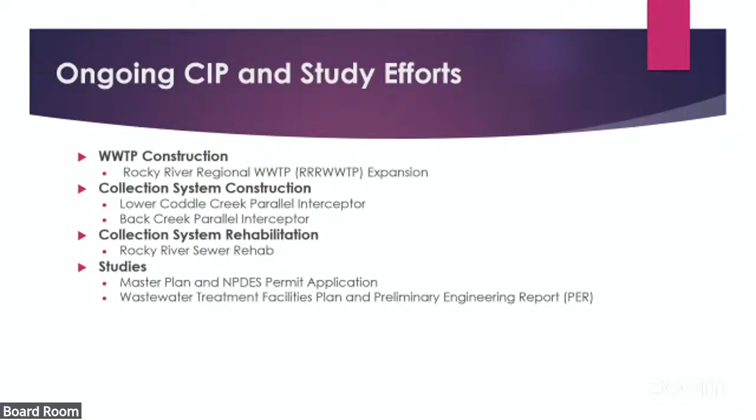Mr. Chairman, members of the board, it's been a couple months since we've done a summary of our CIP projects and where they stand, so just bringing that back to you tonight. There we go. Okay. So there are a number of efforts. We'll start with the treatment plant expansion, work through a couple of collection system projects, one collection system rehab project, and a couple of studies that are still ongoing as well.

And so Rocky River expansion, with all of the really small text here and a few pictures to the side. Over the past couple months, we have completed and commissioned Aeration Basin 5. We've got a series of 3 different aeration basins that we are doing modifications to as part of the phase 4 work. This was the first one of that phase 4 work to be commissioned in its new state at the plant, so that was a great milestone. We've tied in and commissioned all of the new RAS pump stations. We don't have RAS pump stations 1 and 2 for reasons unknown.

But they're all done and those are tied in, so we celebrate that as well. The EQ tank number 2, the work there continues. The interior shotcrete is done. The exterior shotcrete and the wire wrapping around the exterior has begun on that one. We completed the dissolved air flotation thickeners building, the DAFT building, and Crowder started installation of interior mechanical and electrical components there. There's a lot of work going on at the main pump station at the moment.

We decommissioned existing aeration basin 4. That is the next one in line. So we started from 5, we're going to 4 and then to 3. So we decommissioned it and Crowder began excavation in front of it for the aeration basin number 4 upgrades there. And the interceptor building is nearly finished at this point. Hopefully within the next month, we're finished there. But a lot of the interior features are going into it now.

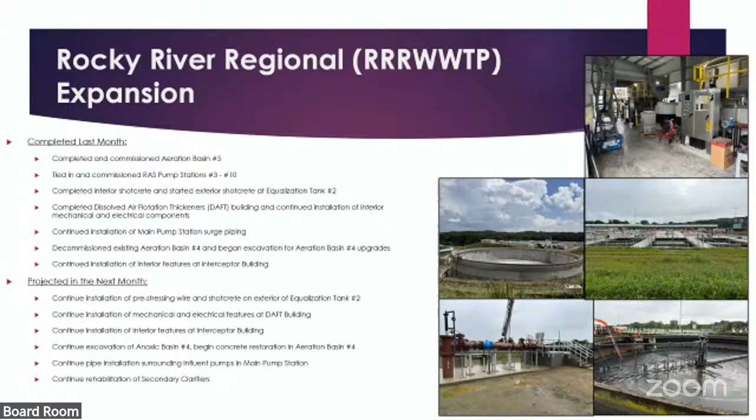This piping, these valves are original to the plant. We're putting some larger pumps down in there, so we'll have a new set of valves and 2 new pumps there as well once we're done with that. And then continuing rehabilitation of our existing secondary clarifiers also.

So moving on to a couple collection system projects. Lower Coddle Creek Parallel Interceptor is underway. This is going from the Rocky River Road area up towards Roberta Road, kind of that general area of things there. The contractor has installed about 4,800 feet of 48-inch pipeline so far.

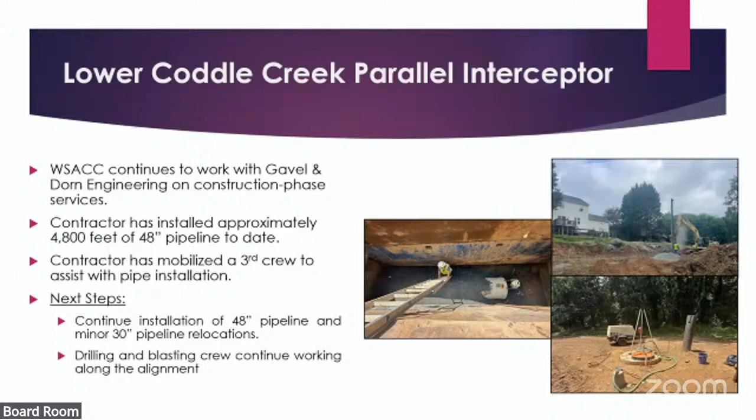They have mobilized a 3rd crew, so they had crews 1 and 2 within their workforce. They brought in a subcontractor with a 3rd crew, for 3 total, to assist them with pipe installation. So they are going to continue with that pipe installation, and drilling and blasting work is continuing for that as well.

Back Creek Parallel Interceptor. So far they have installed approximately 6,800 feet of, this one is 36-inch pipe. They have completed bores at Raging Ridge Road and Hickory Ridge Road. Hickory Ridge Road is kind of the upstream end of this work for them.

Our blasting consultant has completed pre-blast inspections along the alignment, and we're continuing to work with Black and Veatch and with Park, who is doing the installation work on this project. So they're going to continue installation of that 36-inch line and then restoration efforts along the alignment as well.

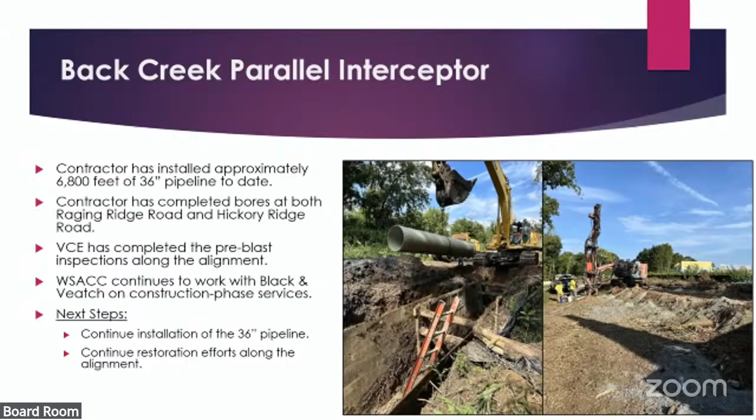So moving on, this is a rehab project along some existing sections of the Rocky River interceptor for us. HDR is working on design for this so far. They have completed all the manhole inspections along the alignment. This is a really swampy area, a lot of difficult access through this, so they did a great job getting that done. We have completed some camera inspections for the inside of the pipe of accessible pipe segments, areas that our equipment and our technology was capable of getting to along the Rocky River.

And so HDR is working with a company called SewerAI. They're reviewing that CCTV footage, the manhole inspections, and they're coding that. They're determining future improvements that will be in the plans and specifications that we should receive in a couple months here. And they have subcontracted with Duke's Root Control to perform some additional CCTV and sonar inspection in some of the most difficult spaces to reach along this line.

And so next steps, Duke's is going to continue with that CCTV and sonar inspection, and HDR is going to continue with development of their plans and specs.

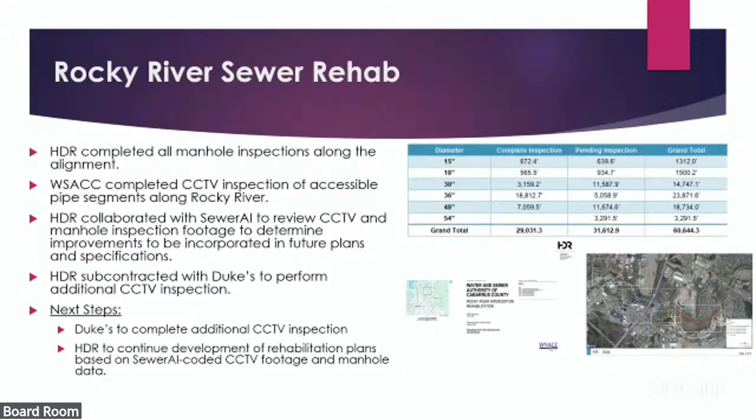So moving on to the master plan and NPDES permitting, this is really the NPDES permitting effort at this point. We did receive some updated speculative limits for the Rocky River plant from DEQ for 36 MGD and 45 MGD. We had requested those a while back. We had a call with the state back in June on these, and that's kind of when the idea of nutrient limits had been swirling around with the state. We had heard some things, and so they finally came back. And right now, the way this stands, we have nutrient limits at both 36 and 45 MGD.

And so their rationale for this is the impairment of Blewett Falls Lake, which is downstream. And so they say for any expansion beyond current permitted flows within the basin, they are pursuing that across the board per EPA guidance. And so along with this, Black and Veatch has continued their work on the engineering alternatives analysis, or EAA. They will submit that draft EAA to us for review. Looks like that should be within the next couple weeks.

We, along with Black and Veatch and Brown and Caldwell, who is working on the wastewater treatment facilities plan, are continuing to consider the impacts of those nutrient limits and coordinate with conceptual design for Rocky River pieces in the wastewater treatment facilities plan. And so following our review and any changes to the EAA, we'll submit that to DEQ, to the state for review. And then following DEQ's approval of the EAA, all the acronyms in here, we'll submit the permit application to get those formal limits pages at 36 MGD and 45 MGD.

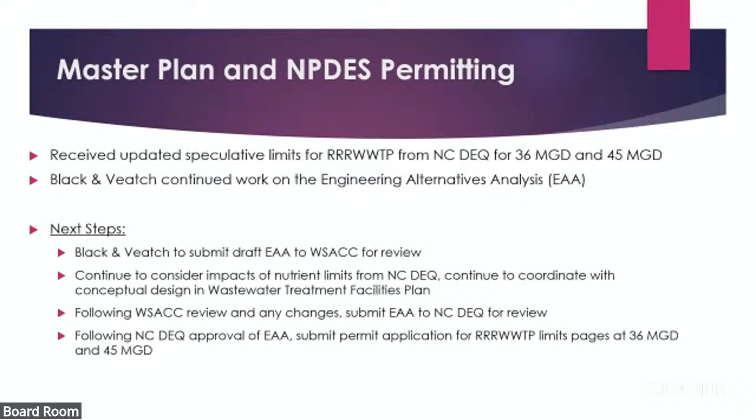I think we have one more project. And so we've talked about some of these components already with the wastewater treatment facilities plan and PER. In the past couple months, we have received and reviewed several technical memoranda from Brown and Caldwell, some at the Rocky River plant for the incinerator condition assessment and capacity, the expansion alternatives that George presented a couple months ago

here, that formal TM, the hydraulic model updates for the Rocky River, along with the Muddy Creek wastewater plant expansion alternatives analysis, and the Mount Pleasant pump stations review as well. The next steps for that really relate to conceptual design. So for Muddy Creek, that's the expansion to 0.66 MGD. We expect that conceptual design draft to come to us in the next couple weeks for review.

So there'll be some review time, some back and forth. And then we'll have conceptual design for that completed once that review time frame is up. Rocky River expansion to 54 MGD. Again, they're including those 36 and 45 MGD tiers along the way. And so they expect to have that to us by the end of this year.

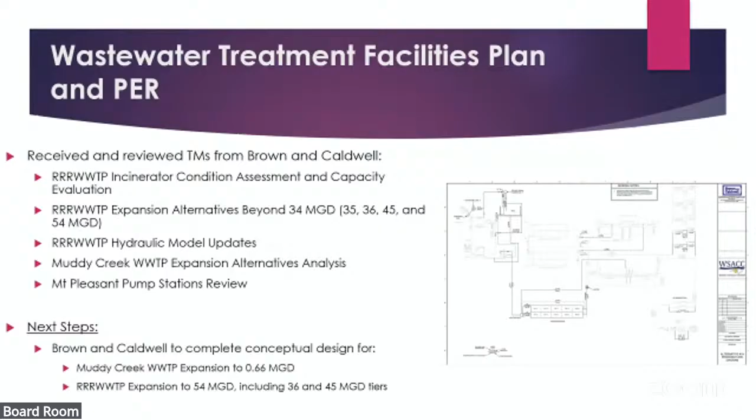So I think that was it. If you have any questions, I'll be happy to take any questions you might have. Questions, updates? Okay, Thomas, you still have the floor to talk about wastewater flow acceptance. Sure. So I've got a short presentation for that as well, many slides.

We do a couple different updates typically during the year for wastewater flow acceptance. One at the beginning of the year, one in the middle of the year. The mid-year updates went out on July 22nd of this year. So just here to talk about those for a couple minutes. First off, kind of the different types of updates that we do. So we can update these

for project level conditions. So there's a subdivision with 100 homes. And in the last 6 months, the developer or contractor has built 50 of those and they're occupied at this point. And so that's an example, based on input from member jurisdiction staff for every single project. We've got a row in a spreadsheet for every single project with flow acceptance that isn't yet fully tributary to either plant. Some other updates that we consider are calendar year flow updates.

This is only for the end of year, the January updates, based on previous calendar year actual average flow at either plant. And the final update, which is more conditional on when a capacity expansion is completed, is a capacity update, and that's when additional capacity is available for allocation from an expansion at one of the plants.